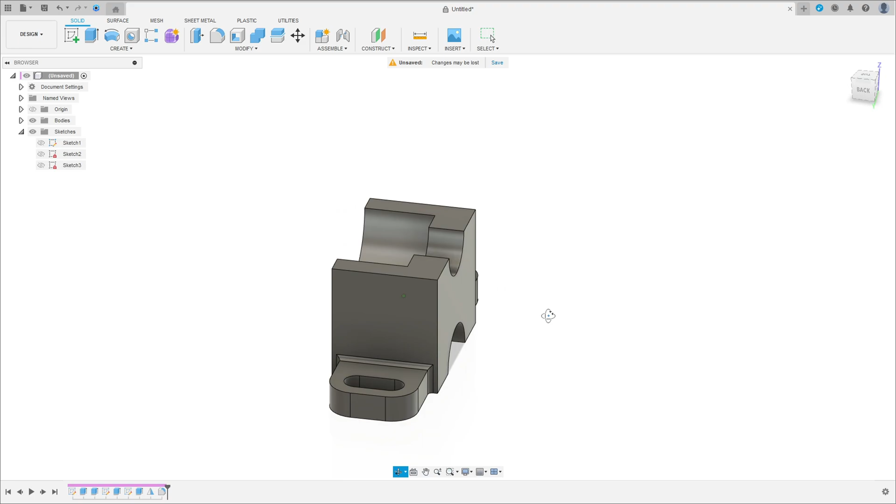So open your Fusion and let's go.

First, go to Create a Sketch and select the right plane. Select your 2-point rectangle. Make a rectangle here with 90 millimeters by 70 millimeters.

Press OK. Go to Constraint. Select the midpoint. Click on this line and this point here.

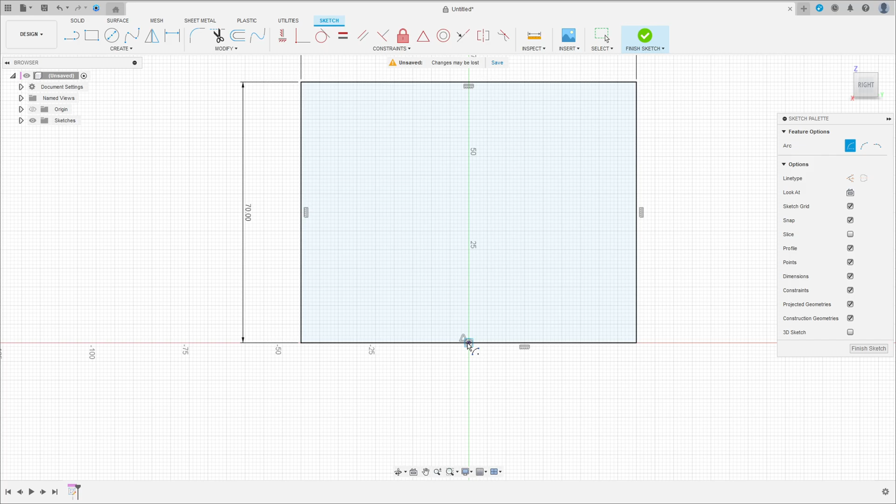That's okay. Go to Create and select Arc, Center Point Arc. Click here in the midpoint. Make an arc here with 20 millimeters of radius.

Okay. Now click here in the midpoint of this line here. Create an arc here with 17.5 millimeters.

Okay. Create another one with 32.5 millimeters.

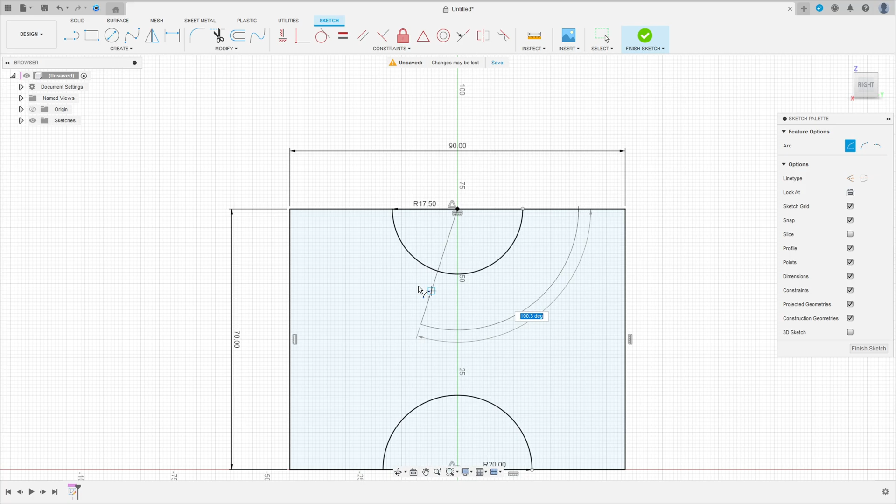Okay. Now finish the sketch and go to Extrude.

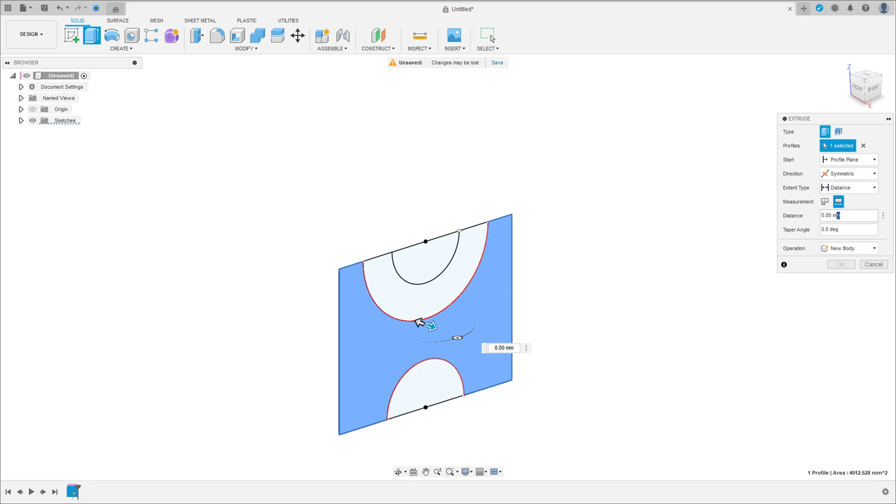Select this profile here. The distance here is, the direction symmetric, measurement whole length, and the distance here is 60 millimeters. Press OK.

Now show the sketch one again. Go to Extrude. Select this profile here. The start offset here minus 10 millimeters, and the distance here minus 20 millimeters.

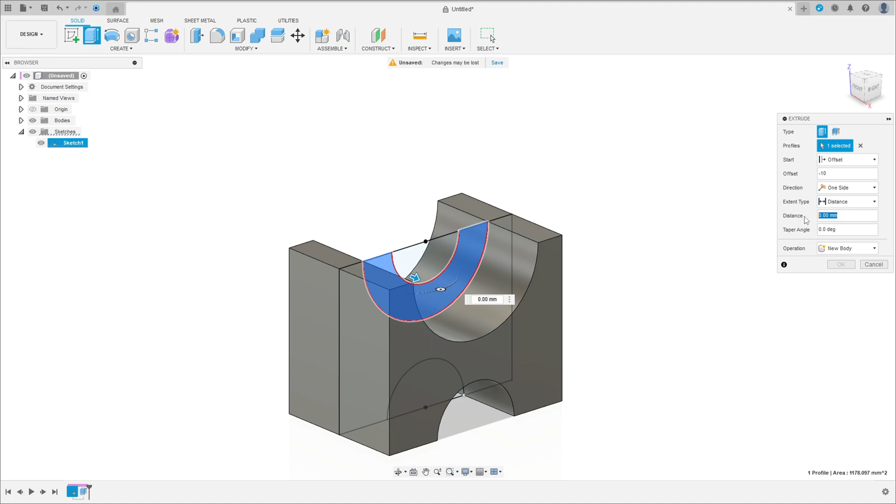We'll have this. Okay. Operation join. Press OK. Hide the sketch one. We have this. Go to Create a Sketch and select this face here.

Select circle. Click here. Make a circle here with 25 millimeters of diameter, 25 millimeters.

Go to Sketch Dimension. Click here in the midpoint of the circle and this edge here. The distance here is 20 millimeters.

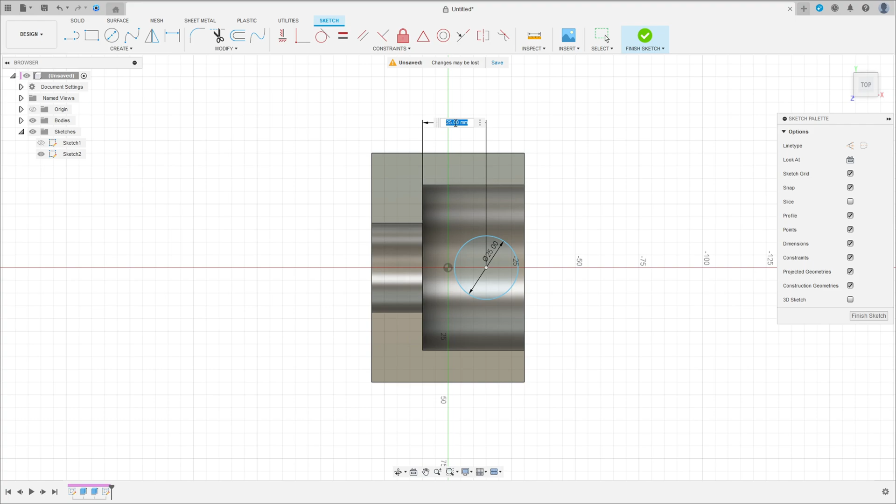Okay. Go to Constraints and select horizontal vertical. Click here in this point and the midpoint here.

Finish the sketch. Go to Extrude. Select this profile here. The operation here is cut. The distance all. Flip this and press OK.

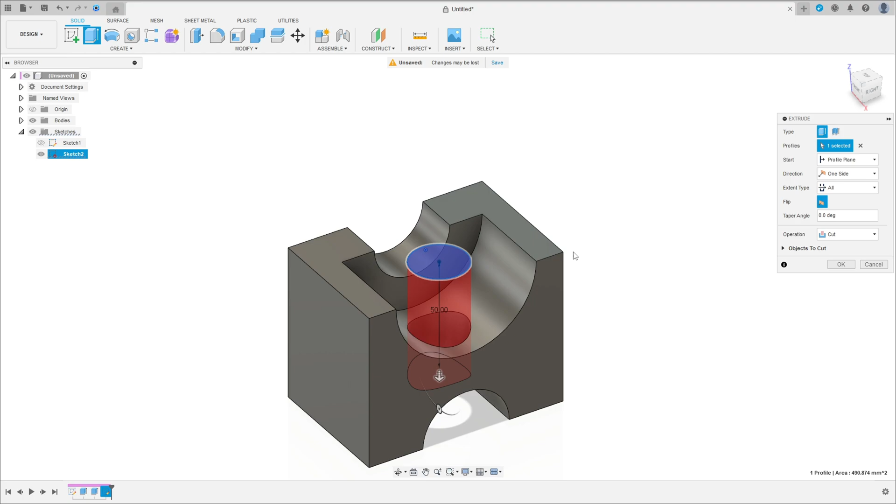We have this. Okay. Now go to Create a Sketch and select the top plane. Select 2-point rectangle. Make a rectangle here with 50 millimeters by 40 millimeters.

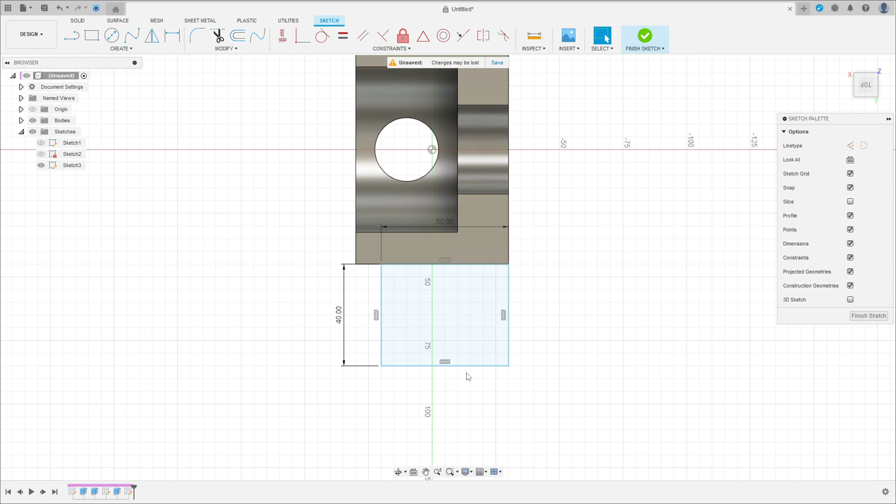Press OK. Let's move this a little bit. Okay. Go to Constraint, select Coincident, select this line and this point here.

And go to Sketch Dimension. Click here in this edge and this point. Or click in this edge and this edge here. The distance here is 5 millimeters.

Okay. Go to Modify and select Fillet. Select this point here and this edge. The fillet here is 15 millimeters.

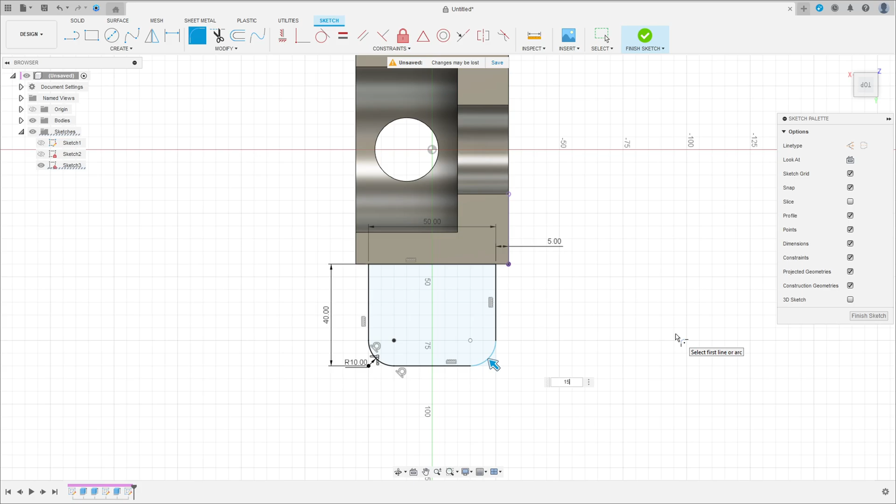Okay. Now go to Create and select Slot, Center to Center Slot. Click here in this point and this point. Make a slot here with 14 millimeters and press OK.

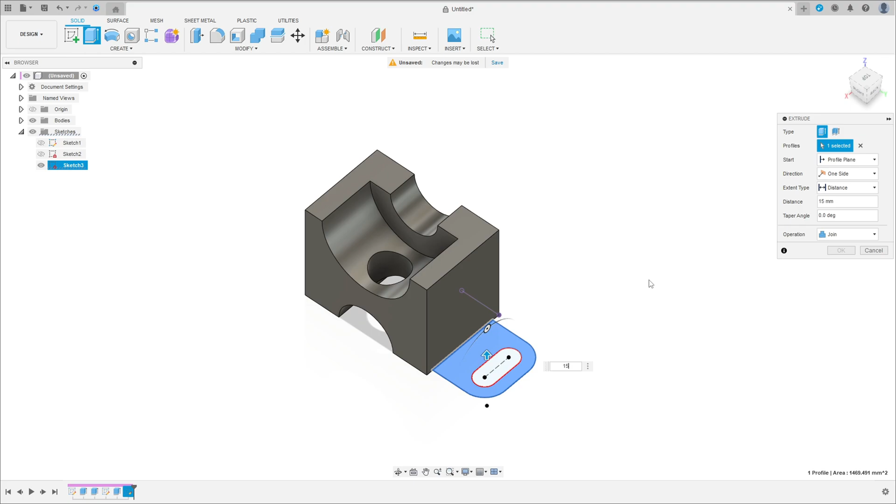Finish the sketch. Now go to Extrude, select this profile here. Extrude this 15 millimeters. Operation join.

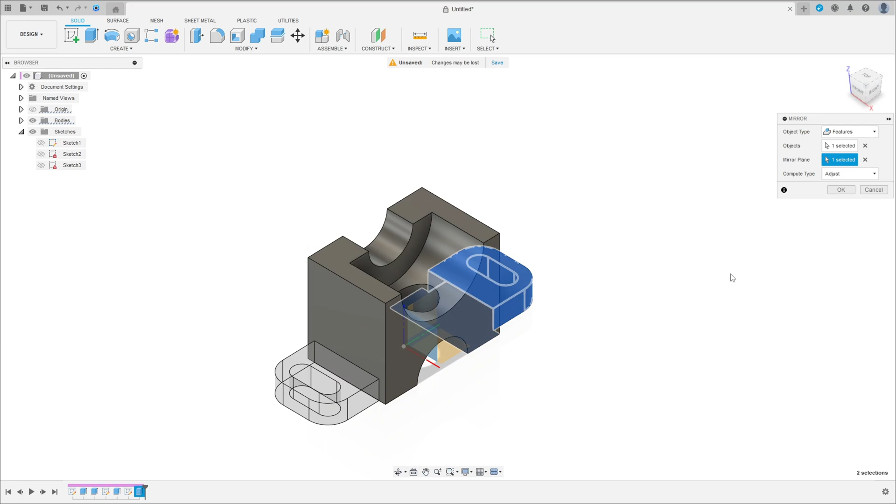Press OK. Now go to Create and select Mirror. The object type, it will be Features, and the object is the last extrude that we made, and the mirror plane is the front plane here. Okay. Press OK. We have this.

Now go to Modify and select Fillet. Select this edge here, this edge here, this edge here, this edge here, and this edge, and one more. The fillet here is 2.5 millimeters and press OK.